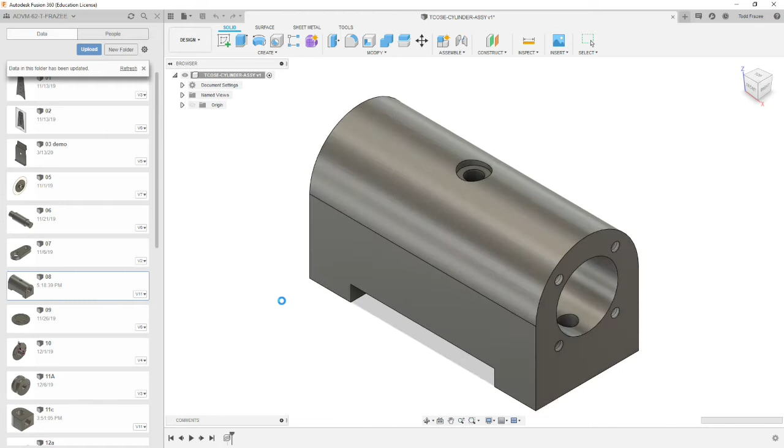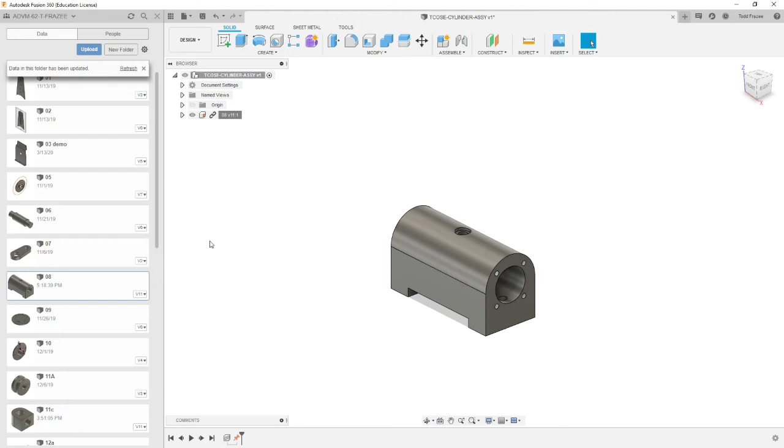Okay, we're going to bring in our dash 8 model. We're just going to accept its natural location, hit OK, and we will ground that model. Alright, so the first thing we're going to install in this is the dash 11 subassembly. So you're going to scroll down until you see the TCOSE 11, not the 11A and B and C, but the 11.

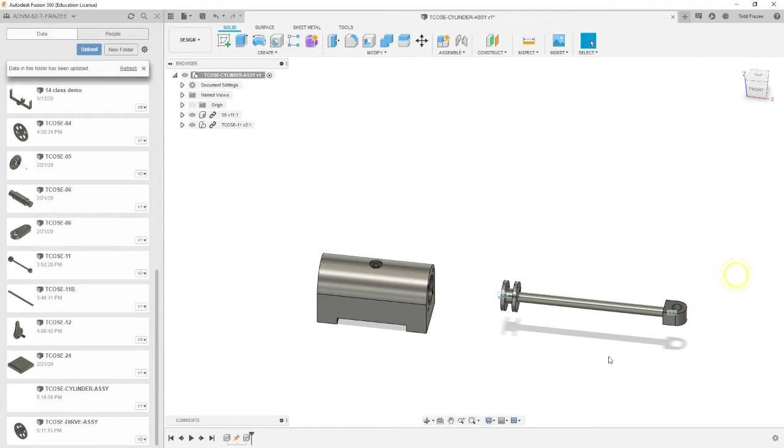And we're going to pull the piston assembly in. That's actually pretty close to where we want it, but I'm going to drag it off to the right a little bit so that we can look at it. Is it okay? So the cylinder slides back and forth. The piston slides back and forth in the cylinder.

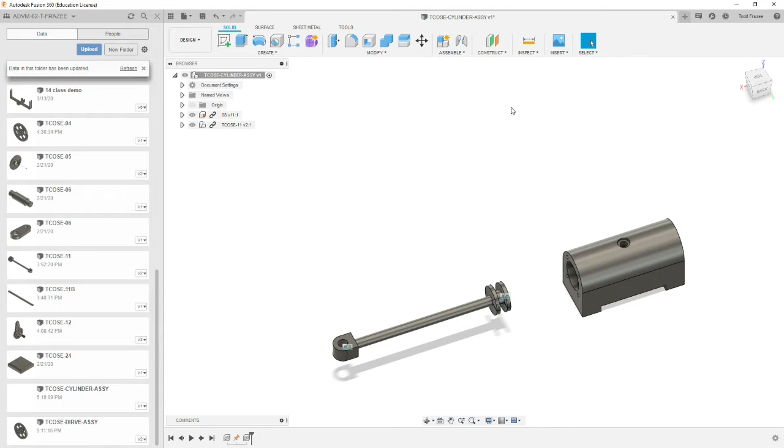In its design state, it could spin also, but once it's mounted to the drive assembly, the hole in this end of the rod is going to be parallel to this face of the piston housing. And so we want to assemble it as such. So we want to use a joint assembly, and we're going to pick the end of our cylinder at the center.

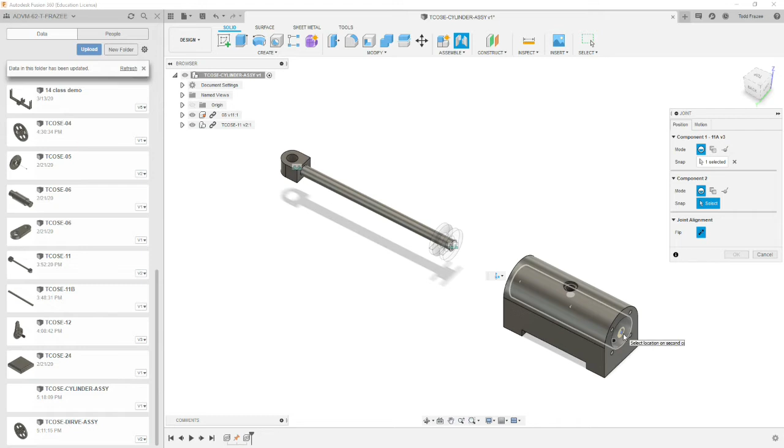Then our corresponding edge is going to be the center of the opposite end. Before we do that, let's change our type to cylindrical and pick the extreme end of the travel. Okay, it's going to give us a little simulation, and we'll hit OK. Now let's right click on the joint that's been made on the history tree, and we're going to hit edit joint limits.

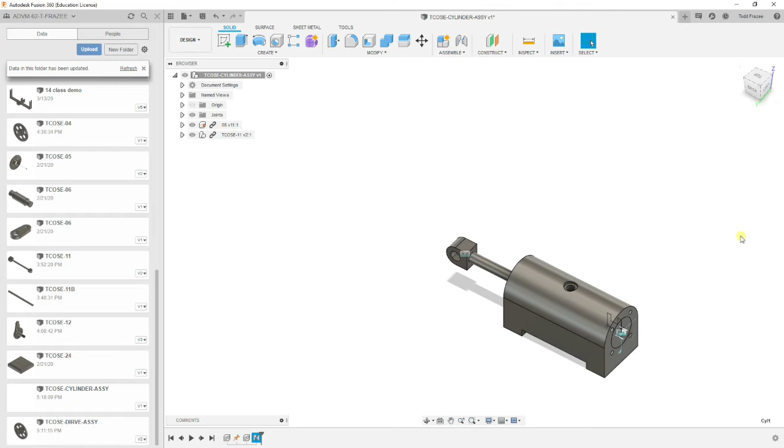So our rotation, we're going to set a minimum of 90 degrees and select OK. And what that'll do is it'll force the rotation to be 90 degrees from what it was when it first came in, and it'll force it not to rotate. It'll still have a cylindrical motion, and it can move back and forth.

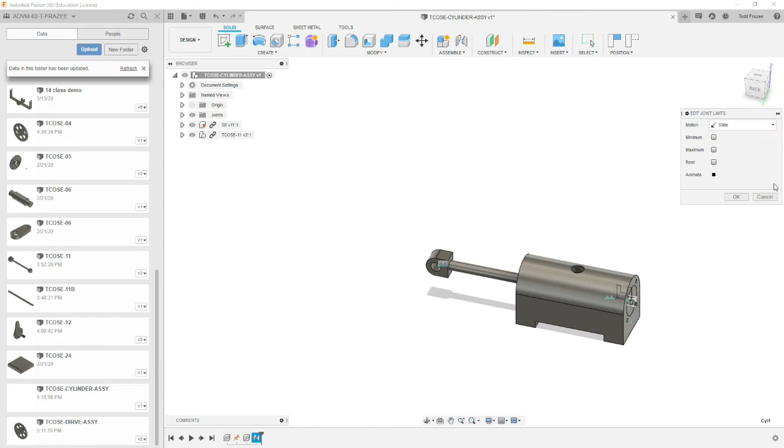Now we're going to go back to edit joints. We should have done this instead of exiting, but we're going to hit slide. Now we're going to change the slide. The minimum is going to be 0, and the maximum is going to be the length of our cylinder block. The length of our cylinder block is 44 millimeters. So our maximum travel will be 44 minus the height of the cylinder, which is 6. So it's actually going to be 38.

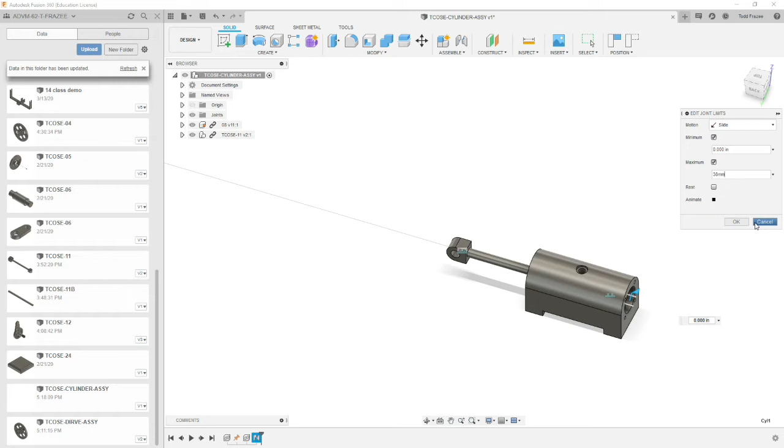Our piston can only travel back and forth the length of the cylinder. Okay, that should be really the only moving part. And what we're going to do next is we're going to put the two heads on that would capture the cylinder. So that is the -9 and the -10. So let's bring in the -9.

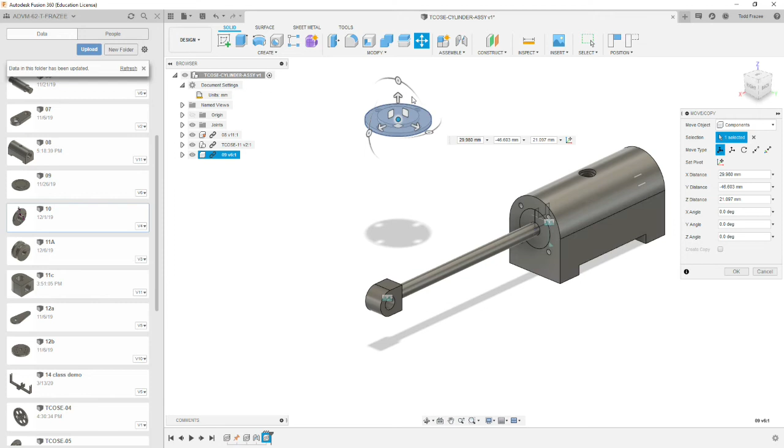And let's flip the -9 as if it would mount where it's supposed to go. Hit OK. I'm going to go ahead and bring in the -10 while we're here. And we're going to rotate it as if, no, it doesn't need to move at all. And we're going to move it out of the way.

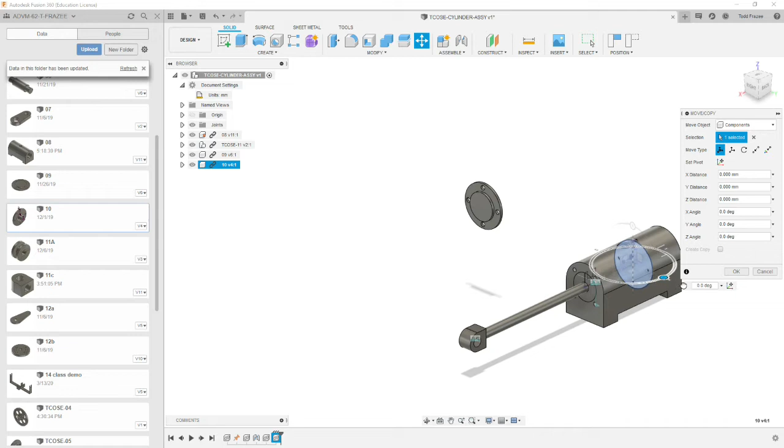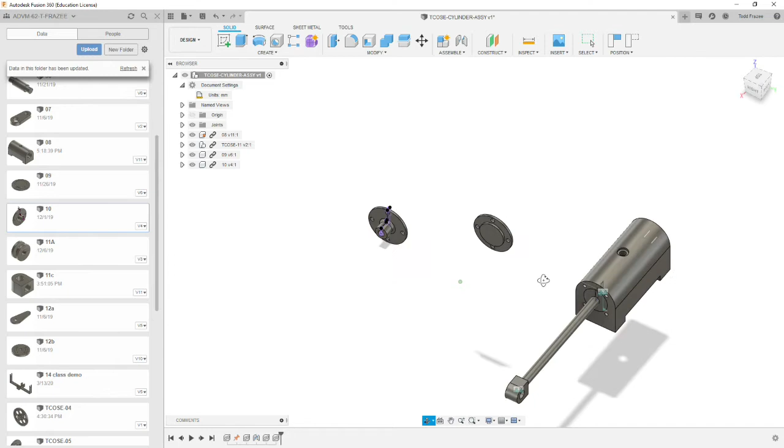Now if you look at this assembly, technically this component probably should have been part of the -11 assembly. It actually has to be mounted on the rod before the piston is connected to the rod. So assembly wise, we're doing it virtually. It works, but in reality it would have to be done differently. Okay, so let's put the -9 on first.

We're going to select joint, capture position, and we're going to pick on the actual edge of the flange. That way we get the center, but it's at the level at which it'll mount to the cylinder. The boss you see goes inside the cylinder, and now that I look at it, we need to adjust the travel of the piston so that it's 1 millimeter less on both sides.

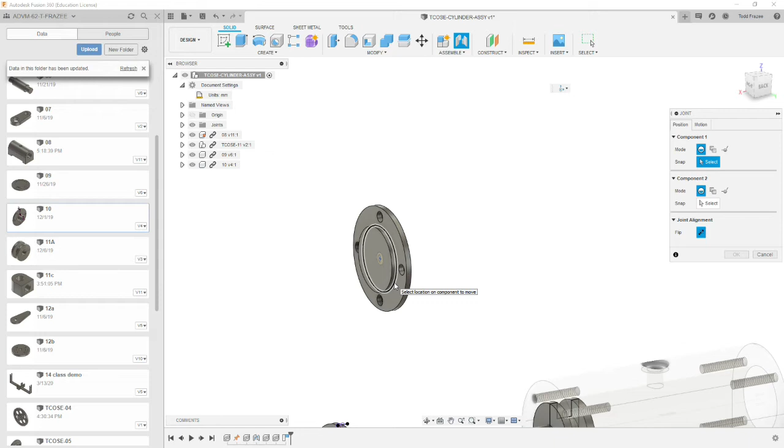So select, and then we select the center of the cylinder, and we're going to change our type to rigid. And then you notice the bolt holes don't line up. Okay, we're going to put an angle of 45 in, and now our threaded holes are aligned with the clearance holes for the bolts. Select OK.

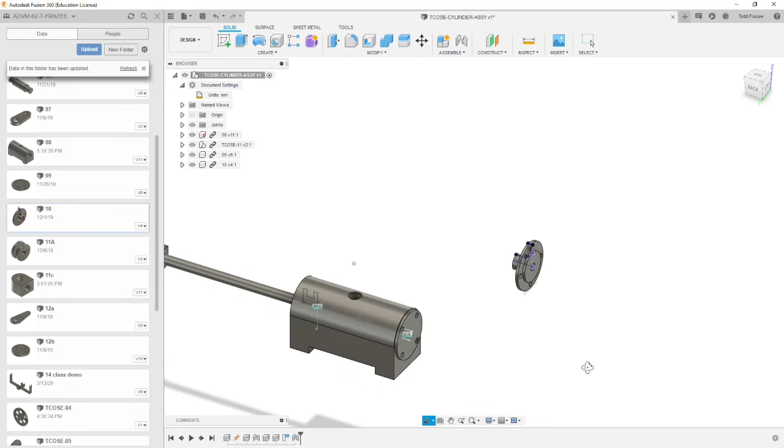Now we're going to go over to the -10 part. Again, we're going to select joint. You're going to select the inside diameter in the same plane as the flange. And we're going to go back over to our cylinder, and we want the edge and the center.

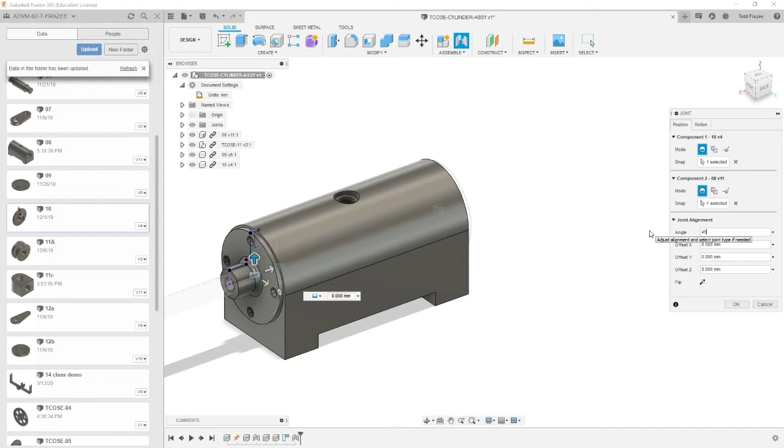Okay, and now we need to go back to our angle, and we need to put 45 degrees in to clock the bolt holes. Select OK, and we should have our cylinder heads all aligned. Okay, so at this point we have the assembly functional, and we just need to add hardware. So we should be able to slide this back and forth.

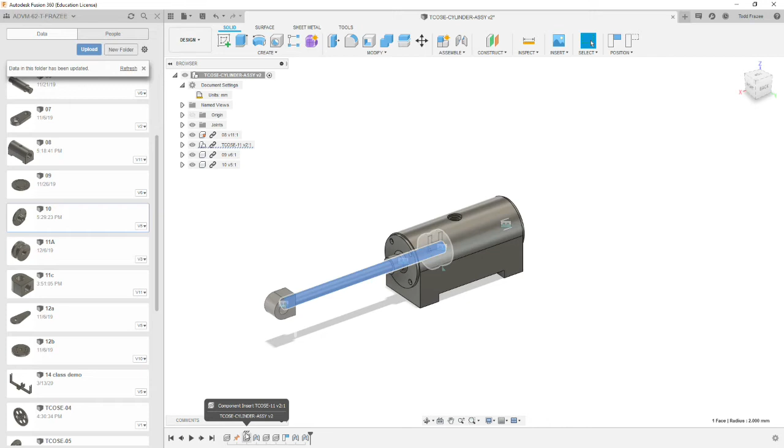Now let's modify the travel on the piston to account for the bosses on either side. They're 1 millimeter tall, so we need to go back to that joint and edit it. Okay, so it should be right after the component. We highlight the component and it'll show up with these little tick marks, and it should be the joint that followed it. So we're going to edit joint limits, and we're going to leave the rotation alone.

We're going to go to slide, and we're going to put in a minimum of 1 millimeter and the maximum of 37. So you're not going to see anything visible, but you'll be able to travel 1 millimeter less on each side and be realistic. Okay.

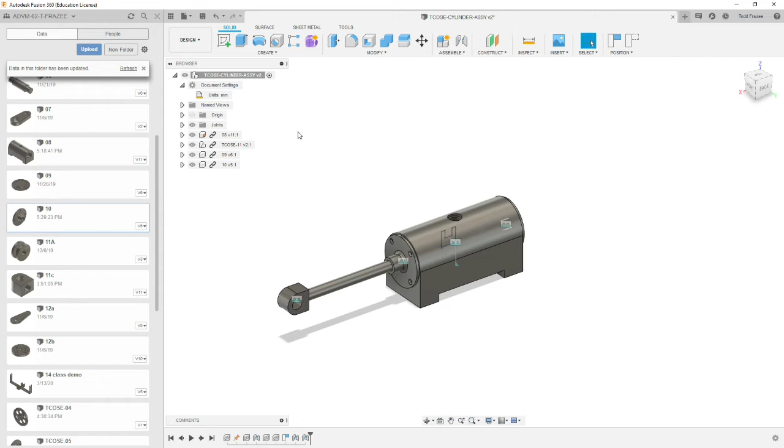All right. So now we just need the pins. If we look at the -8 drawing, there's a pin that goes on either side. One has a threaded feature on it, and one is just a press fit. And then we also need to put in the M2 by 8 screws that hold the heads on. So let's start with the 3mm plain pin, and it is 11 millimeters long.

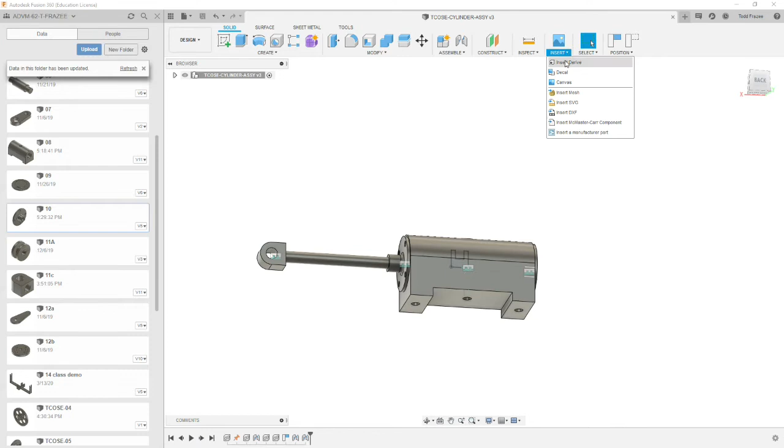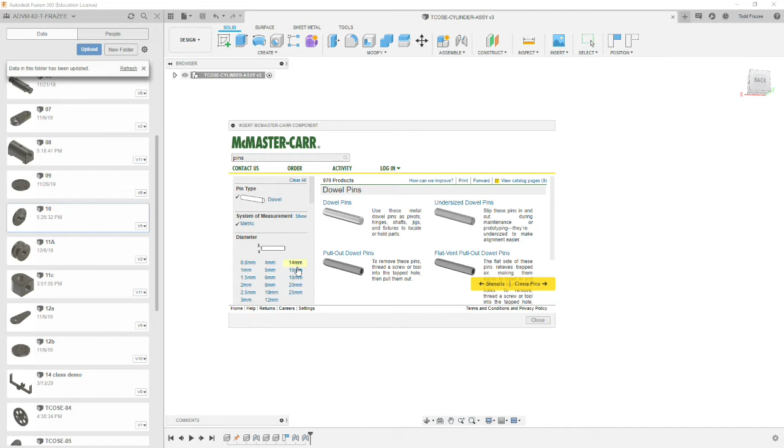So we're going to go to insert, and we're going to insert a McMaster-Carr part. Now again, we want pins. And we want a dowel pin type. Want dowel, metric. The diameter is 3 millimeters. Length 11. We may not be able to get 11. Looks like we got an option for 10 or 12. What we're going to have to do is select 12 and maybe shave a millimeter off.

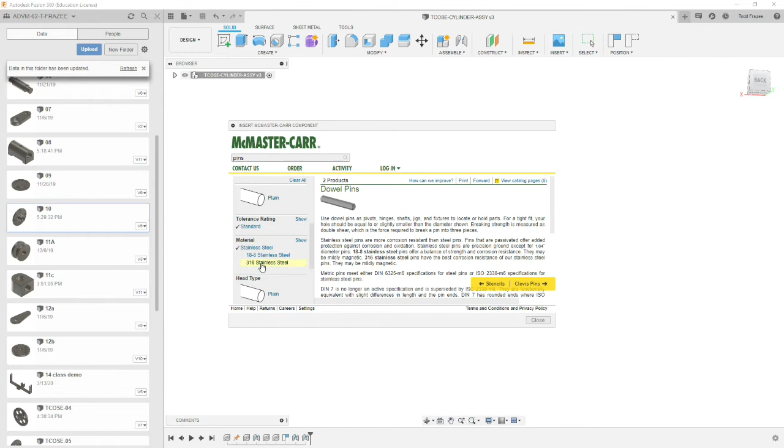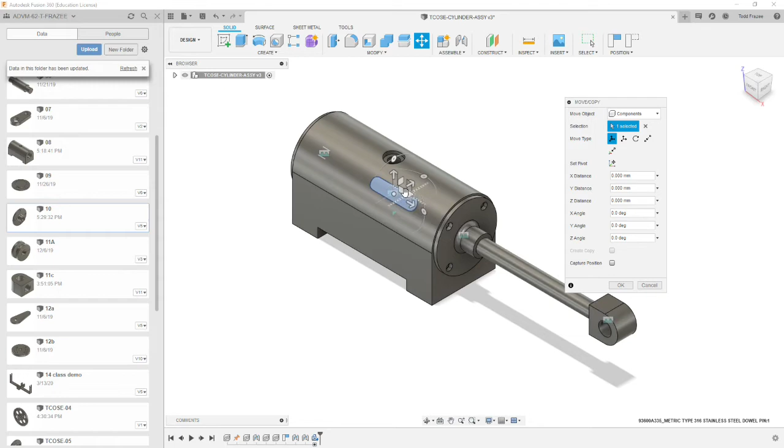We're going to go chamfered, standard tolerance, stainless steel, 316, plain end, and then we're going to go to product details, scroll down until you see the 3D models. You want 3D SAT, and we're going to save it. And here we have our pin. Let's move it out of the way so we can see it and select OK.

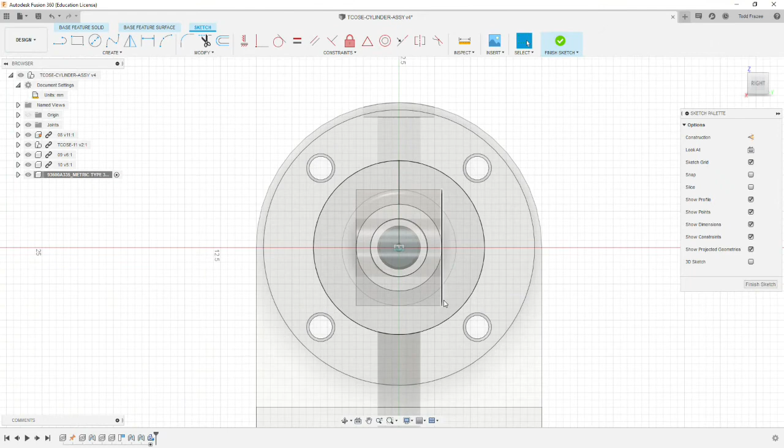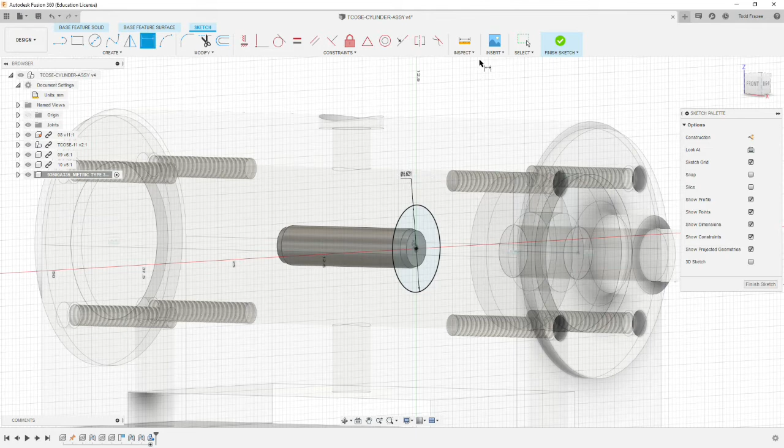Okay, click into space to deselect. Right click on the pin. We're going to edit feature, and we're going to create a sketch on one end of the pin. Alright, once you're in that view, we're going to draw a circle on the center of the pin. Somewhat arbitrary, it doesn't really matter what diameter it is, as long as it's bigger than the pin. And we'll put a dimension on it. And you're going to hit finish sketch.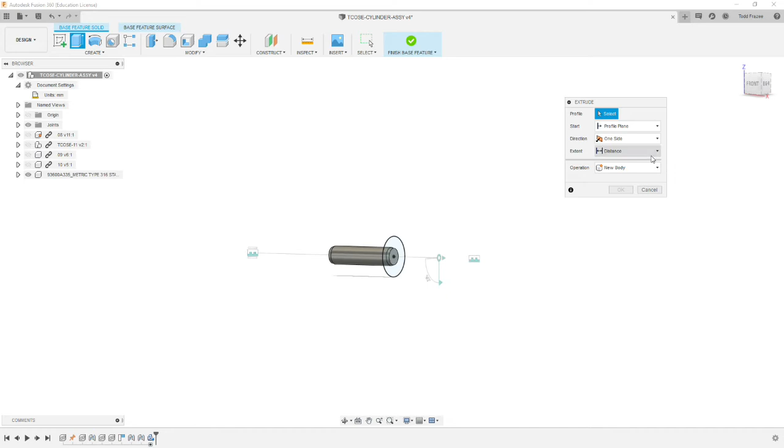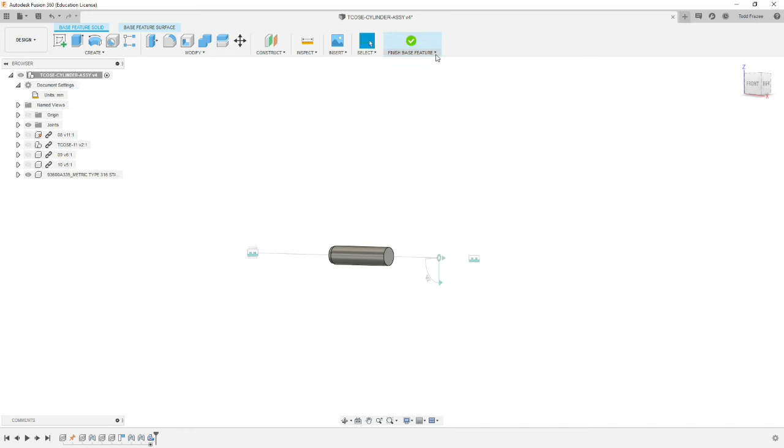And we're going to do an extruded cut, which is confusing because we can see the entire model. So let's make the rest of the model invisible for now, so that it makes a little more sense, by selecting the eyeball icons. And we're going to go a distance. We're going to cut inside the circles, and we're going to go negative 1 millimeter. And it's going to turn it into a cut. And select OK. And we now have the one side of the pin trimmed down to the length that we're supposed to have. Hit finish base feature. And now we can turn the rest of our assembly visible again.

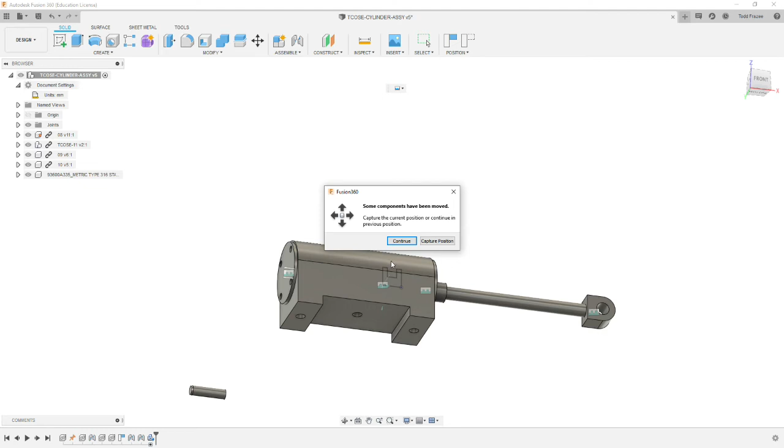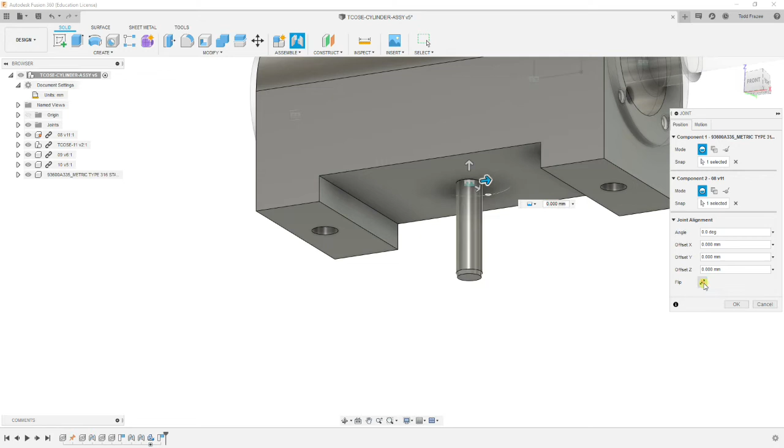So in this joint, it's going to be a little tricky. We have a pin that's going in a hole, but we don't want it to go to the bottom of the hole because it will go through into the cylinder and stop the piston from going back and forth. So we're going to capture its position after we hit joint, and we're going to pick the center of the end of the pin, and then we want to pick the end of the hole that that pin's going in. Now it defaulted to joining it backwards from what I intend, so we're going to flip the direction. And right now the pin is located at the very end of the hole.

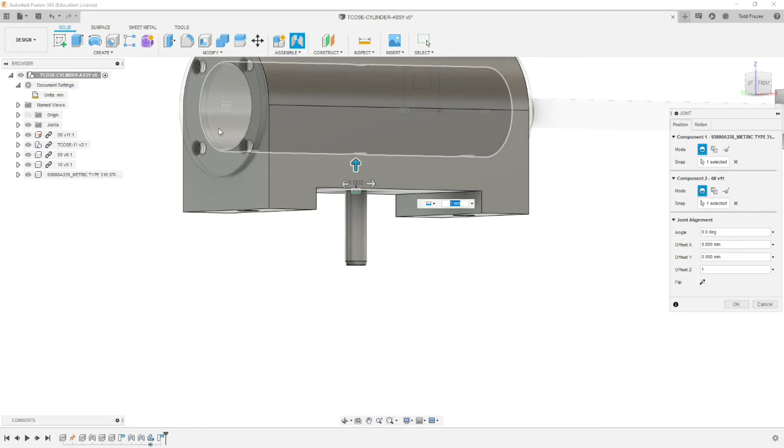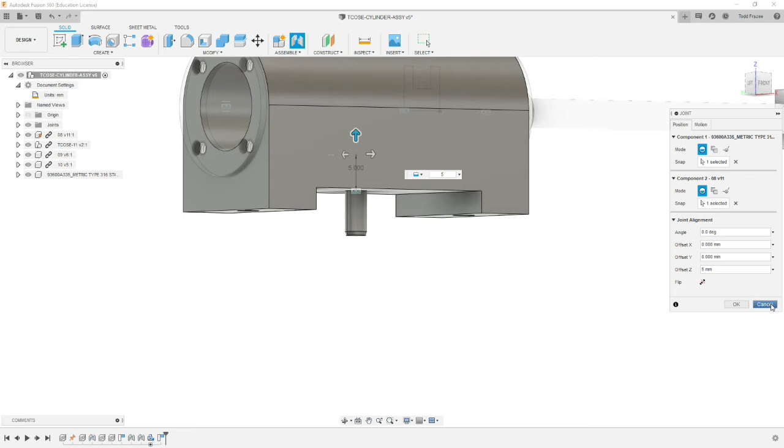We know our cylinder diameter is 12. We know the distance from the edge here, this foot, to the center is 14. And we know the distance between this ledge and this base is 3. So if we take half the diameter, which is 6, and subtract it from the 14, we're left with 8, minus the 3 of this ledge. We should move this 5 millimeters in the z-axis. And we should have our pin below flush right at the bottom, just like we want. Select OK.

Now we need the stud that goes in the opposite side. It's a pin with a thread on one end. It's a 3 millimeter pin with an M3 thread on the end of it that's 13 millimeters long. I suspect in the US we're not going to be able to get a 13 millimeter length, but we'll see. So we may need to cut that pin down like we just did.

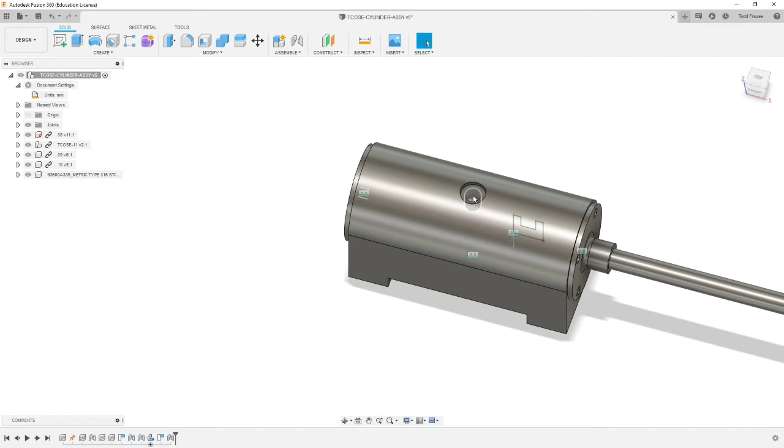Alright, so let's go out to McMaster-Carr. We're going to go to Insert, McMaster-Carr Component, and we're going to type in stud. Threaded studs. We want metric, and we want an M3.

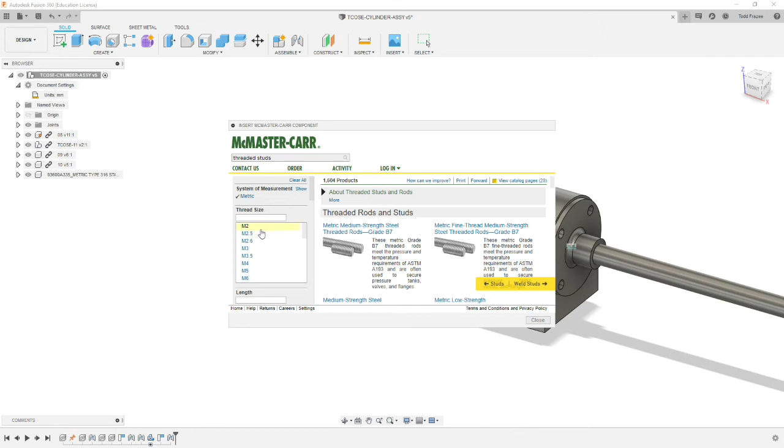Okay, yeah, it looks like there's only one thread pitch available, and we want threaded on one end. Material steel, it's the only thing available, and it has a slot in it. We don't really care about that, that's the way they come. Here's our length options. We can get 6, 10, and 12. So a 13 is not even available.

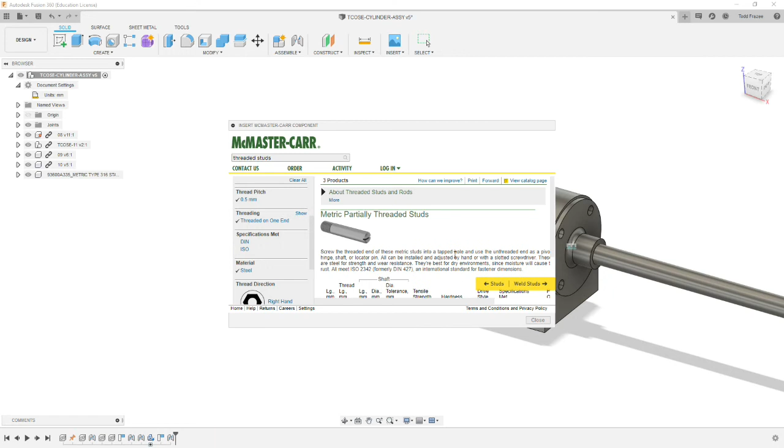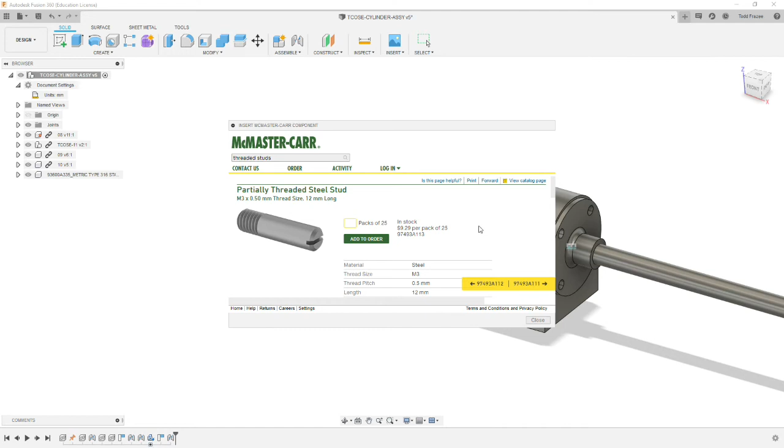So what we will have to do is get a 12 millimeter pin and press it 1 millimeter less into the hole. So we're going to select the 12 millimeter length. We're going to go to product detail. See there, we have a custom pin made over 1 millimeter. Scroll all the way down. We're going to save the SAT file.

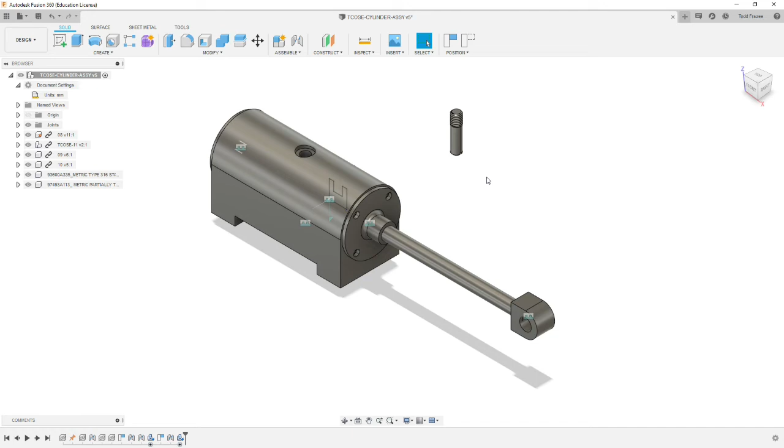Let's move it out of the way. And we're going to flip its orientation 90 degrees. I'm sorry, 180 degrees. And we're going to select OK. Now, this particular pin is 12 millimeters. And the pocket that comes down into here, this counterbore, is a millimeter deep.

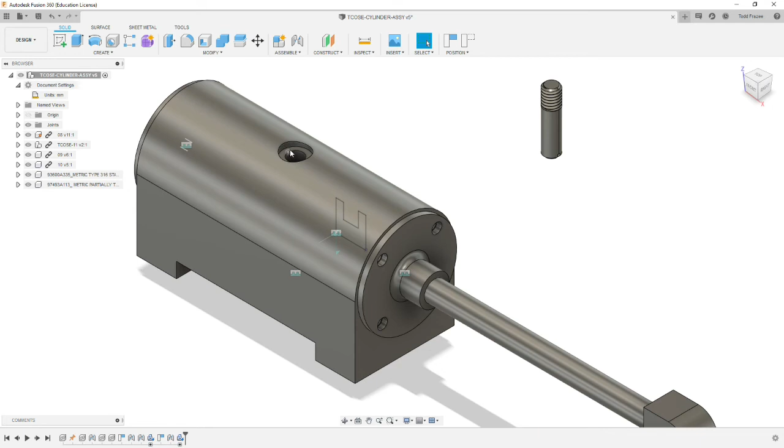So if we have a 10 radius and we subtract 6 from that, we're left with 4. Minus the millimeter for the counterbore, that is 3. So we should have 3 millimeters of shaft here, or of pinhole here. So what we're going to do is we're going to joint the end of our slotted pin.

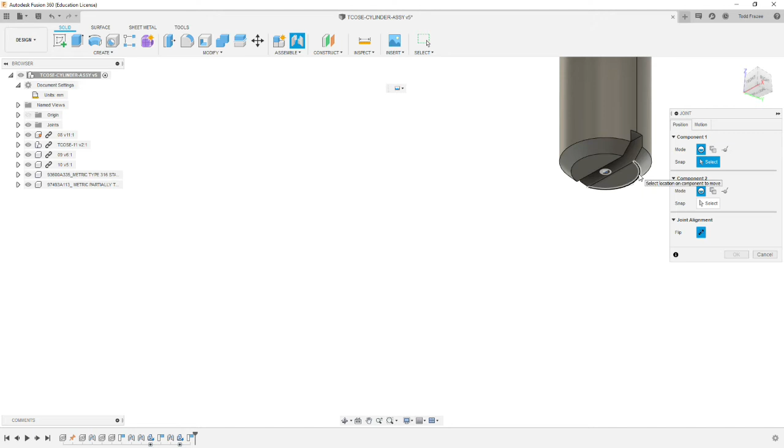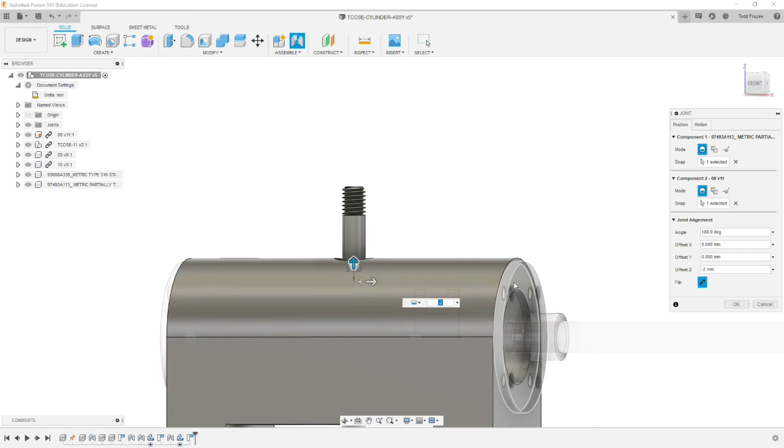We want to pick one of the circles so the snap point's in the center. And we're going to make a rigid joint with the center of the hole. And we're going to select the Z-axis. We're going to go -2 millimeters instead of 3. And that should give us enough protuberance that we have 13 millimeters sticking out from the dimension as called on the drawing.

The downside is we don't have as much purchase and strength on that press fit. I'll say OK. Now all we have left is the screws that go in the ends. I'm going to demonstrate how to do it on one end of the part, and you're on your own for the other side. So let's go to McMaster-Carr.

Okay, and we're looking for screws. And we're not going to be specific in our type in. We want a metric screw. That's interesting. It gives inch sizes with the metric. And we're looking for, according to the drawing, an M2. It has brass in the drawing, but I don't think we can be picky at this point.

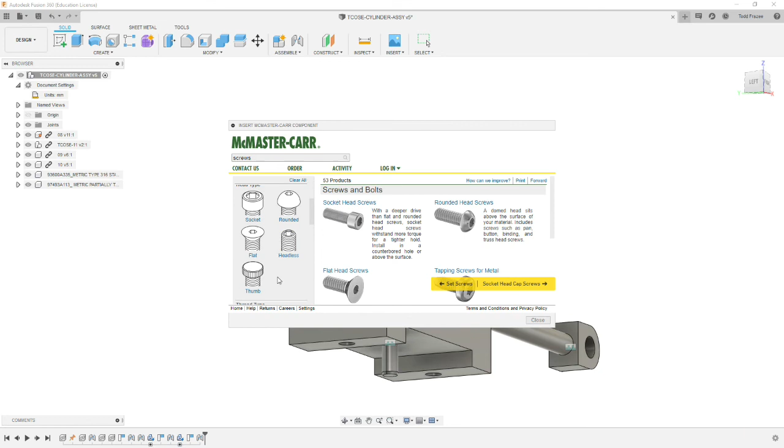And we're going to go for a length of 8 millimeters, which is what the drawing says. And we're going to go with a head type. We have different options. So we're going to go with a rounded head. And in the drawing he has a slot. And it's telling me that we have two different head types for that particular round, what they're calling a round head. It's a pan and a cheese head. Looks like a big wheel of cheese.

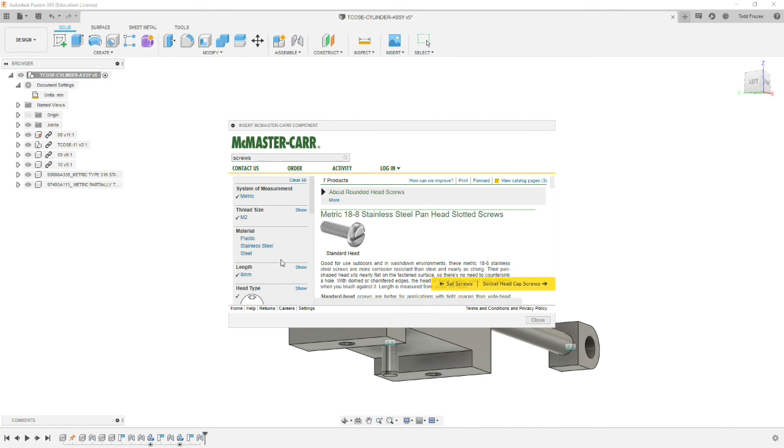All right, let's scroll down and see what we have as far as materials available now. Plastic, stainless steel, and steel. So I'm thinking we're going to go with stainless steel, and that might decide the head type. We're going to go 316 stainless. And that determined the head type we have to have. We have to have a rounded head with a slot in it. We have to buy a box of 100.

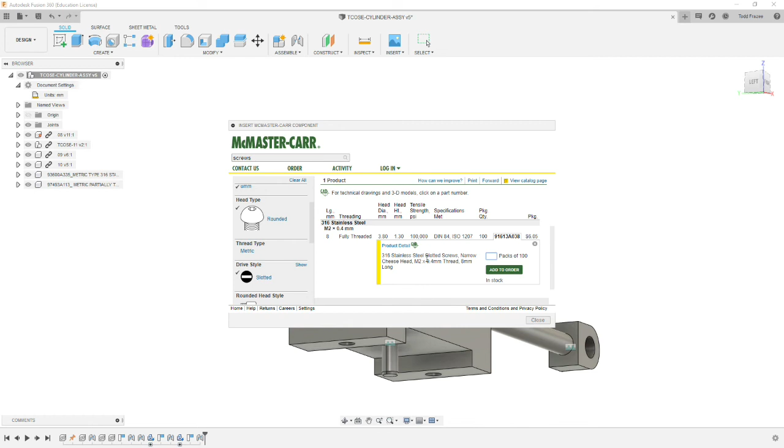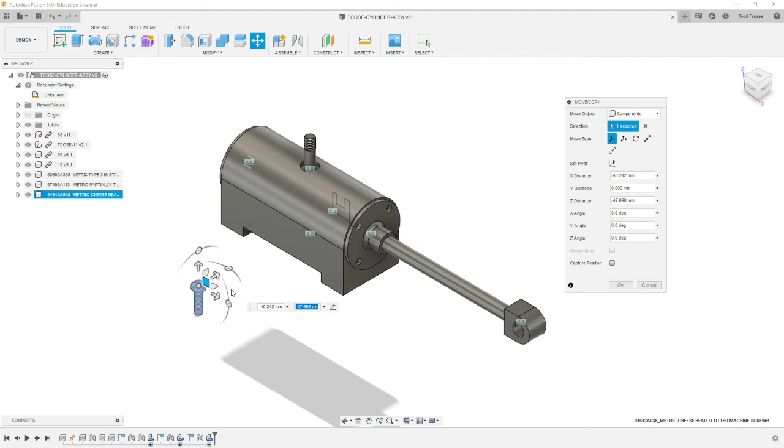We go to product detail, and we're going to scroll down to the bottom, and we're going to save off our SAT file. Pull that. Pull the fastener over to the side, and we're going to rotate it in the orientation to go into the head plate. So it'd be 90 degrees this way, and we're going to hit OK. Now I need a total of 8 of those, but for this side I need 4.

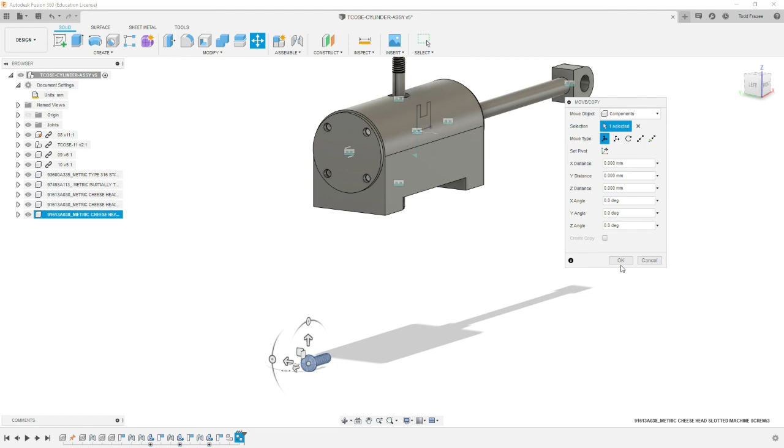So I'm going to right click on the component. I'm going to say copy, and I'm going to pick an empty space and put paste, capture position. Oh, you have to hit OK. Then you hit repeat paste, select OK, and right click and hit repeat paste, and OK. So we have 4 fasteners right there. Let's go ahead and drag them apart from each other. Okay, so we have our 4 fasteners.

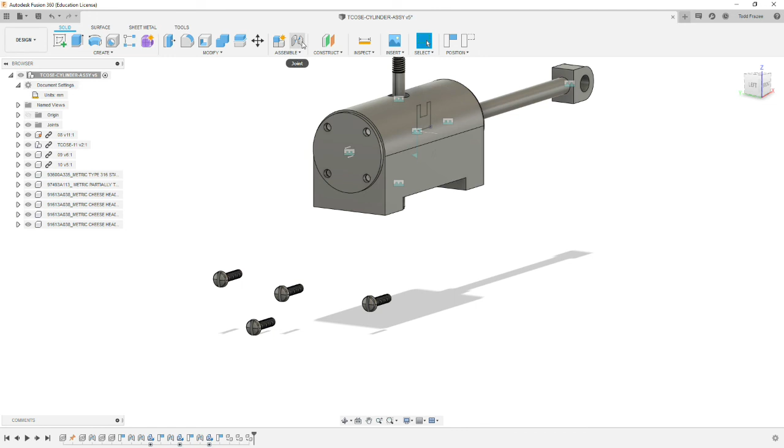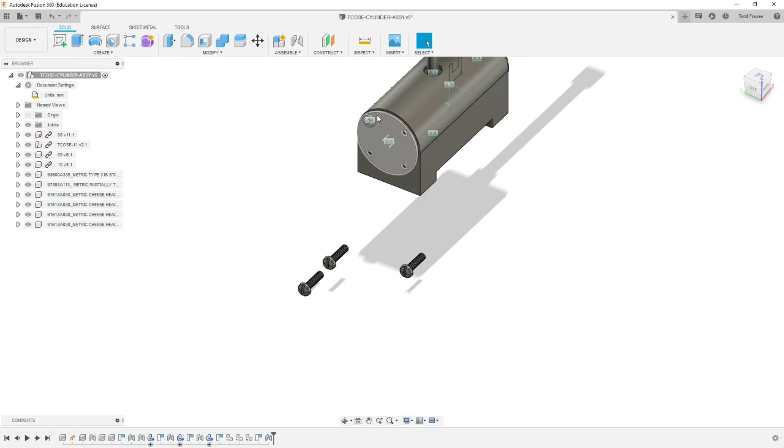Now we're going to create rigid joints with their corresponding locations. So let's go joint, capture position. I'm going to pick up the center of the first hole, rotate it around. I'm going to pick up the center of the bottom of the head of our first fastener. And it's going to do a weird animation. Hit OK, and it should show up where we want it. Voila. Let's repeat that procedure.

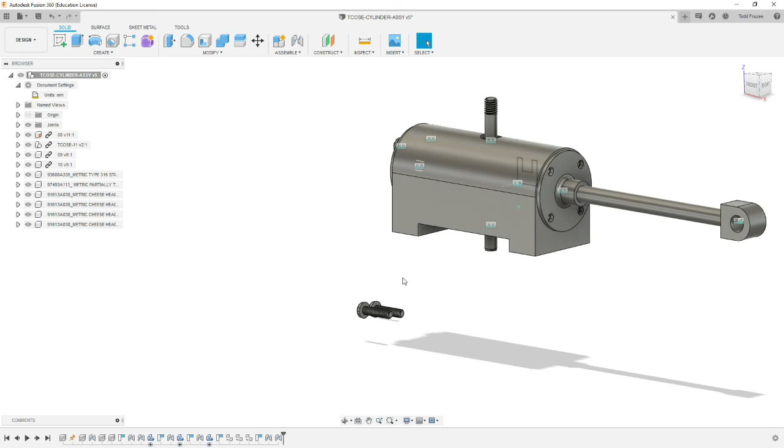Joint, center top of the cylinder of the smooth hole, center of the diameter of the inside of the head, rigid joint, select OK. Okay. I do the same thing. Joint, center top of the hole, rotate around, center bottom of the fastener head, select OK. Don't be disturbed by the animation, it's kind of loony.

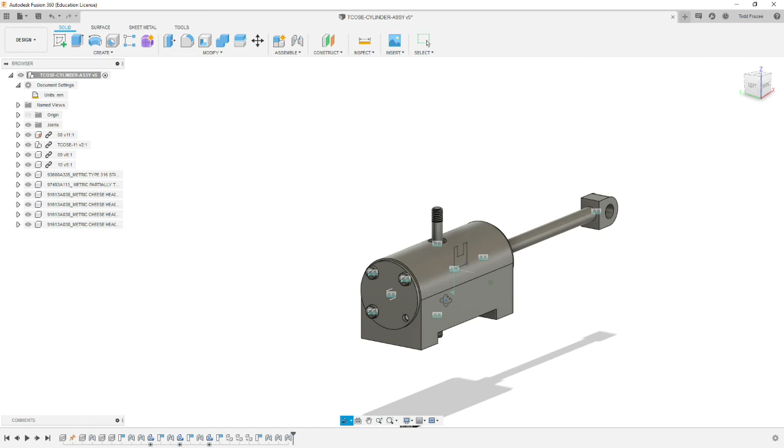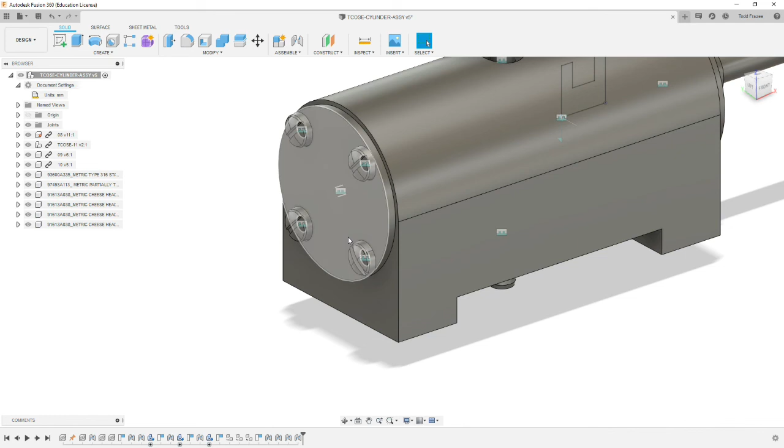And then we'll do our last one. Top of the hole, bottom center of the fastener head, and OK. Alright, so I've now imported, copied, and put all the M2 screws in. Now it's your turn to do the same thing on this opposite side to complete the assembly. That's it for this tutorial, but you'll need to have 4 more screws in than what's shown.

And then of course put a message on Canvas that you've completed the assignment.